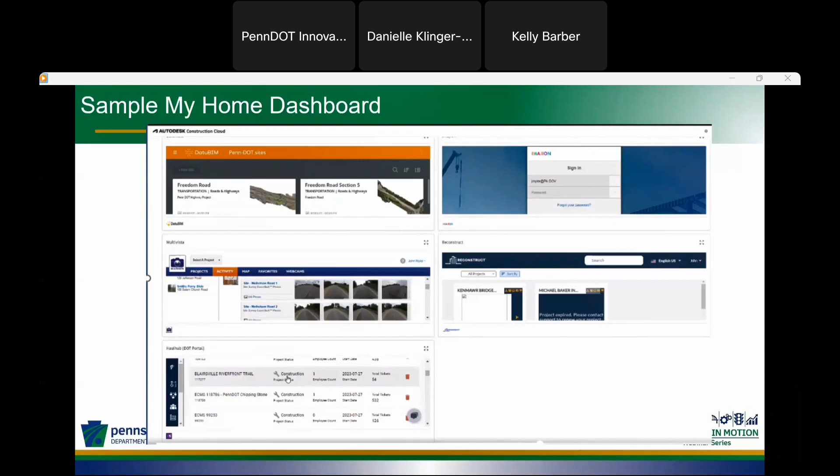Moving on from the My Home side, we do have PennDOT custom cards and interfaces.

The first card you're seeing here pulls information from our MPMS system, our planning system, showing overarching project key information like planned let date, completion date, and current construction cost. This keeps things up front for our project managers since it's pulling from MPMS. If they know their let date is changing and notice in PDCC that they haven't updated it, this could be a trigger for them to update the let date in MPMS, or the completion date, depending on the construction schedule as they complete their pre-bid construction schedule and estimate.

Another partner card that we have is our ASTA district project card. This is more of an overarching portfolio card for the projects. You can see, specific to your district area, the projects you're associated with, where they're at in progress, and if they're behind or ahead of schedule.

We've also created a general bookmark for our custom cards so we at least have those standard links over to PennDOT systems for everyone from that particular dashboard area. We also have our project GIS project map to outline where the project is at in the Commonwealth.

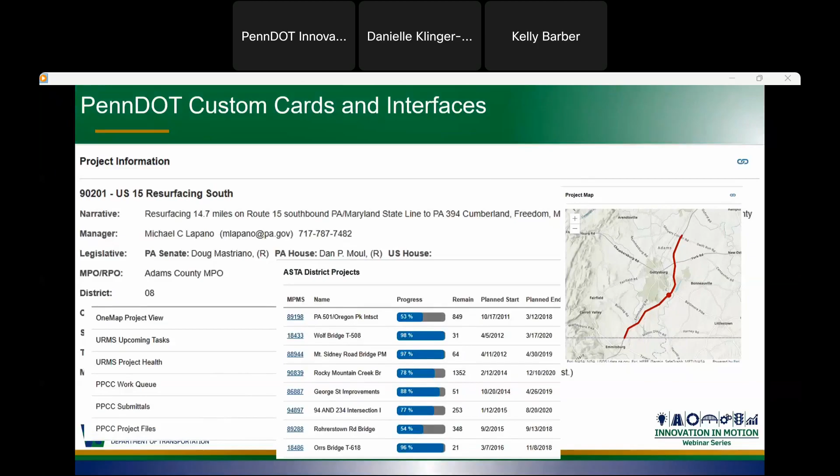Another area connecting that interoperability between systems is how our documents talk between the Collaboration Center and the department's record retention solution, ECS. As documents are created, reviewed, and eventually approved within the system, we need to make sure those approvals are available within the project development checklist in ECMS. The key part to getting things from the Collaboration Center into ECMS is that record retention system, ECS. Everything pulls from that area.

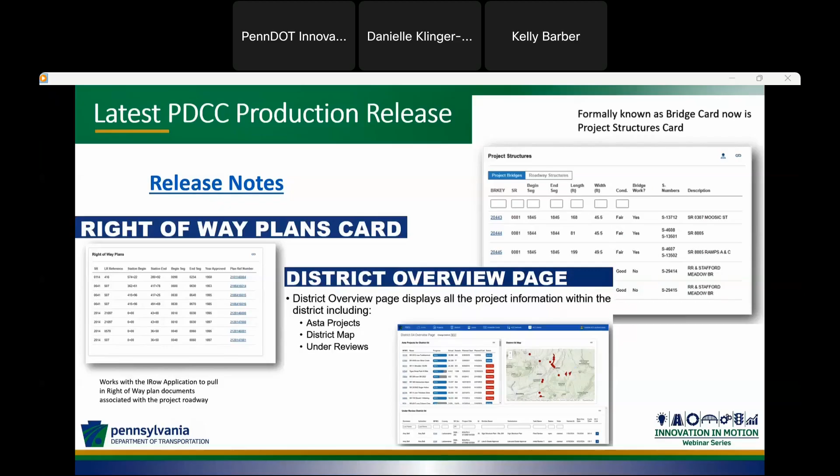Jumping over into the open areas of focus for the team and where we're looking to go with some future improvements and things that will be coming out probably within the next year or so. One is we're working on our consultant workflows.

We have a work group with ACEC PA testing and walking through those workflows within the next month, just to validate that what we have in line makes sense, and from their perspective, streamlines their workflows as well.

We're looking at adding in forms and some other components, which I'll touch on here in a little bit. And then we have the ability to work effectively and efficiently with our Bentley design files. That's another area that we are focusing on.

You'll learn a little bit here in a moment about the Voyager integration, as well as the ability to search across projects.

That is one area that we have been focusing on, is searching across projects and allowing those lessons learned, those successful submittals, to be shared with their project management counterparts, but not having to be necessarily in everybody's project, but being able to have access to get that information and share it.

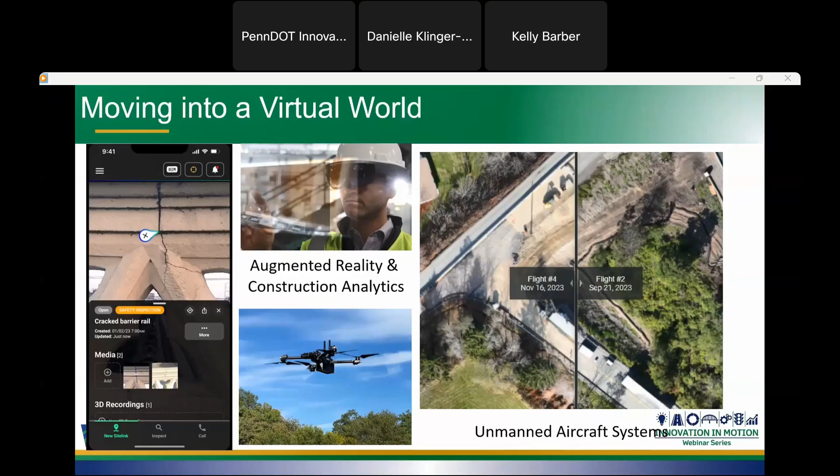So getting into our eConstruct effort, just to set the stage before I show you what we've been up to, we currently have 2 large construction projects within the Collaboration Center environment. They are the Bellefonte Interchange project in District 2, and the other project is in District 11, the Commercial Street Bridge project.

The first effort I'm going to show you is within our DataBIM solution, but DataBIM is also being used on the Bellefonte project as well. Right now I'm just going to be demonstrating and sharing with you what we have on our Interstate 81 Susquehanna River Bridge project, specifically with Randolph Road Bridge.

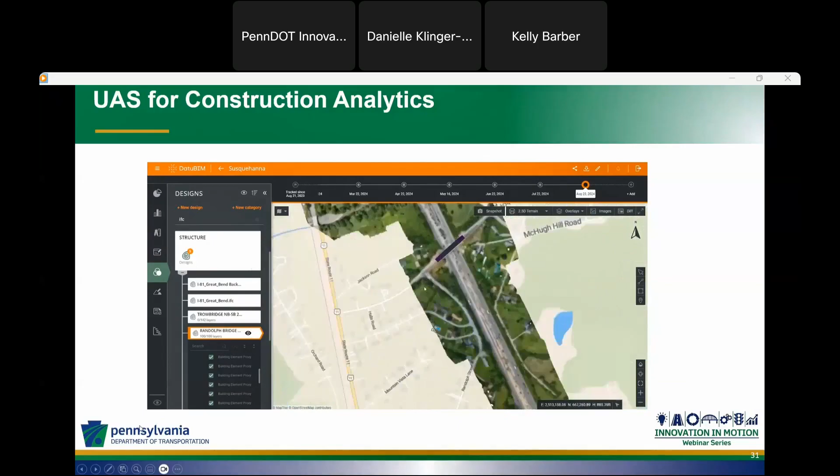So what you're going to see here is we've clicked on Randolph Road. As the video starts to play, they're going to zoom into that particular location. Randolph Road Bridge was designed in Bentley's V8i solution, and I always find this key when we talk about interoperability and the importance of being able to have systems speak and transfer information. This was designed in V8i. The contractor switched it over to Autodesk, so it went to a DWG file, and what you're seeing here is an IFC file. So 3 different file types, all within one project, different individuals touching those files.

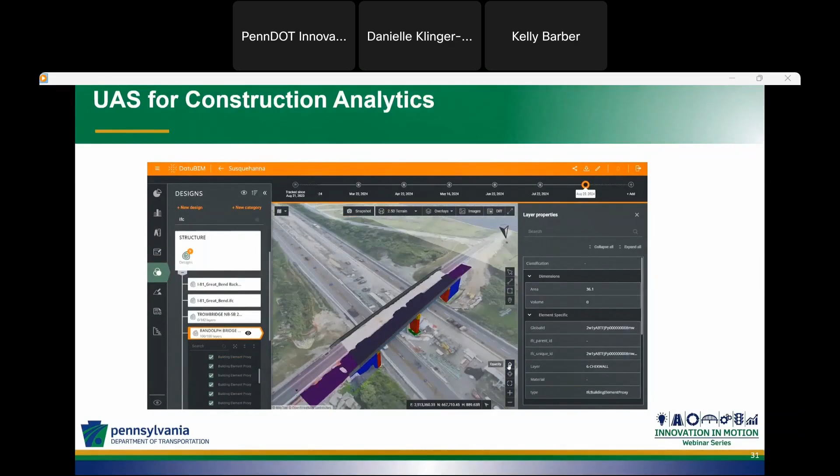As you're going in, you can see the bridge model here. All of those elements were shown previously on the right side as far as key areas. But you can go in and decide which elements you want to see, toggle things on and off, being able to see what's supposed to be there according to the BIM model versus what's actually happening out in construction. Again, bringing that visualization to the project and allowing your teams to see what's going on and focus in with that model. So again, helping with the visualization aspect of the project.

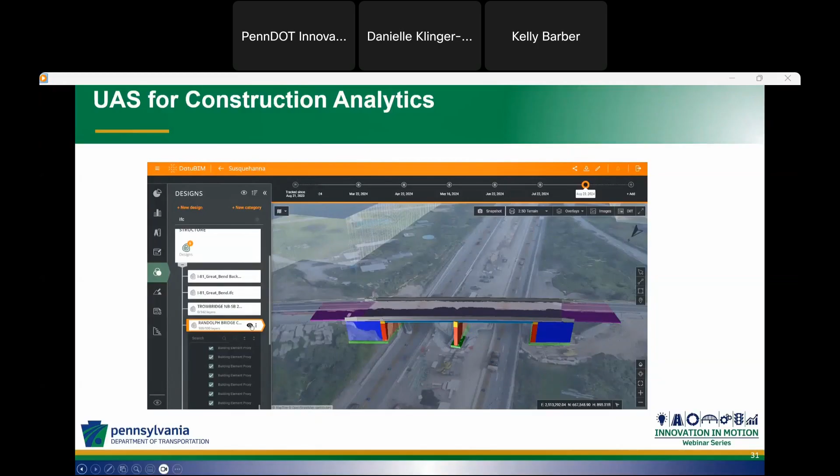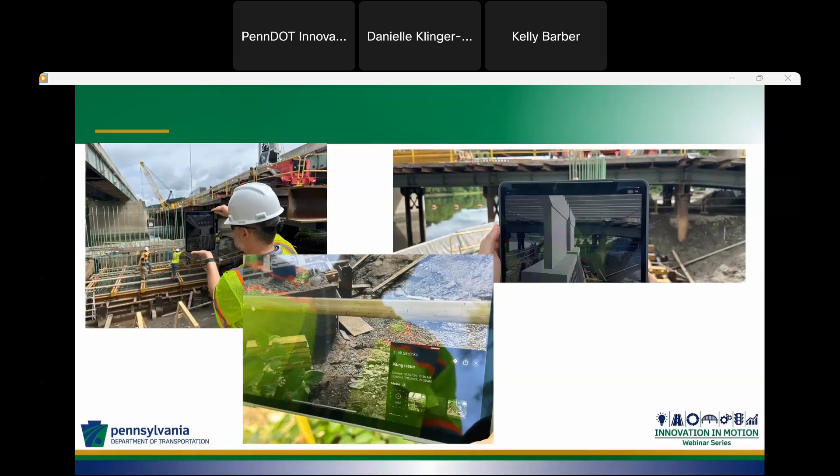So the issues that you're seeing out on this particular project are going to be tying back into the Collaboration Center. So the model files that you see are coming from Collaboration Center, and the issues that you're seeing are going between both areas. So those issues identified in the field in a different system are actually going to be tying back in so that the inspection staff only have to go at one location.

So you can kind of see here we have our site link files here within the Collaboration Center environment. This is a test project, not one of our actual projects out in the field. I just want to make sure you are aware of that. The intent of this is to show you that we have a test project 1 for PennDOT, and it is the same naming convention and title as what we have in the Collaboration Center.

So as we go into the site link application and do our settings, it really is as simple as activating that connectivity between the ACC environment and SiteLink. You can see here, this is the Susquehanna River Bridge, which is where they were out in the field. I'm obviously not out in the field to demonstrate this at the moment, but being able to go out and test those comments, showing you that we've made open comments, or what they call site links. And then they actually do tie back right into our issues over here within that Collaboration Center environment.

So again, just wanted to showcase, you can see Site Link 1 and bringing that over so that our staff, as they're potentially out in the field identifying things, those in the field, other individuals in the field, or maybe back in the office, are then able to see what they're marking up and being able to track and manage those issues.

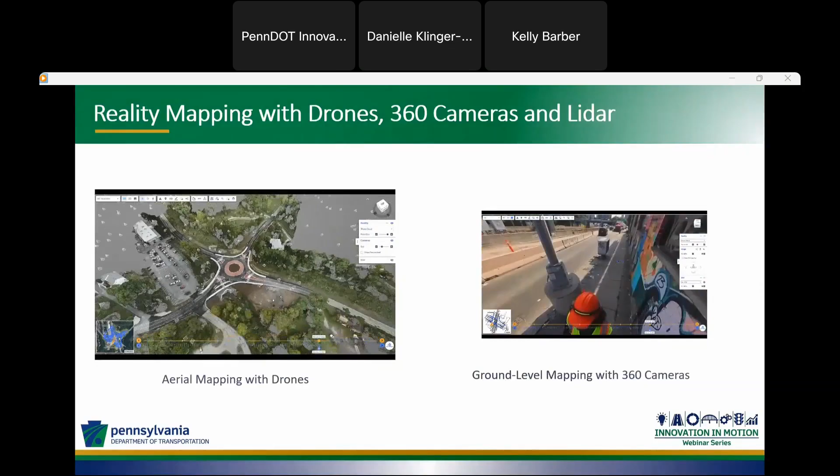Another area we're looking to expand upon is Reconstruct, which we talked about last year. Reconstruct is going to be used on the Commercial Street Bridge project. What you're seeing here is actually our McLaughlin Run Roundabout project, but we're looking at tying in reality mapping from drones on the left, 360 cameras on the right, and LiDAR.

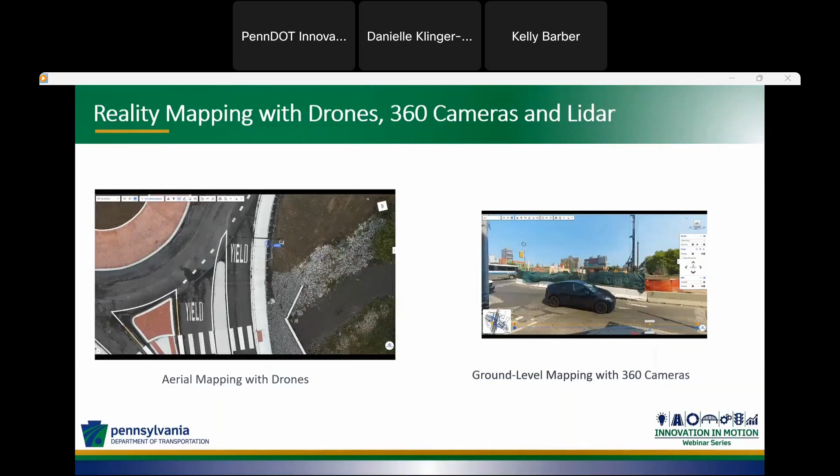One area is looking at what's out there in reality, what's being built, and tying that to the schedule versus what was planned and what's tied with our BIM model with that schedule as well. So that's one avenue we'll be looking at for Commercial Street, being able to compare the two and see how those look.

So on the screen in front of you, the top left is the reality of what's being built and how it's being done. And on the right is what was planned to be done and the time frame it had been planned to be done in.

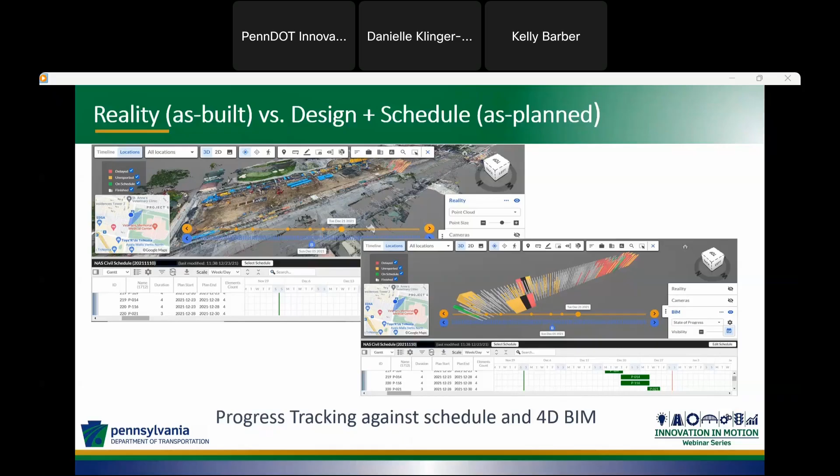This really is going to bring you in as far as that 3D time machine, I guess you could call it, being able to go in with the reality mapping, zooming into those locations, being able to take measurements and area volume as well.

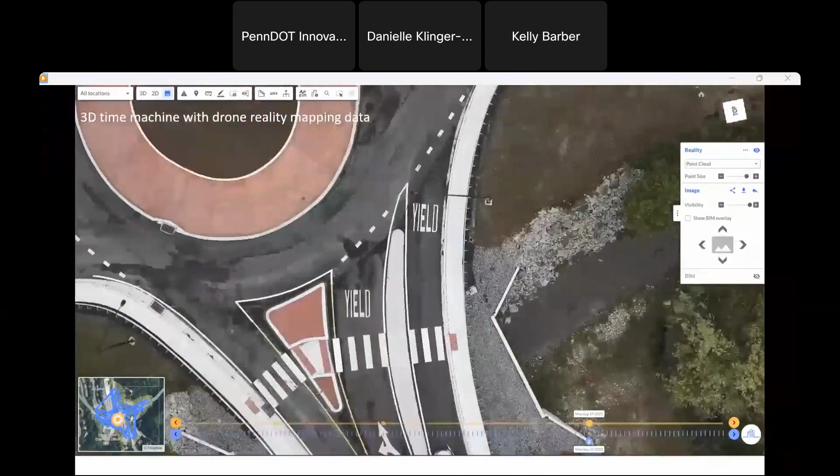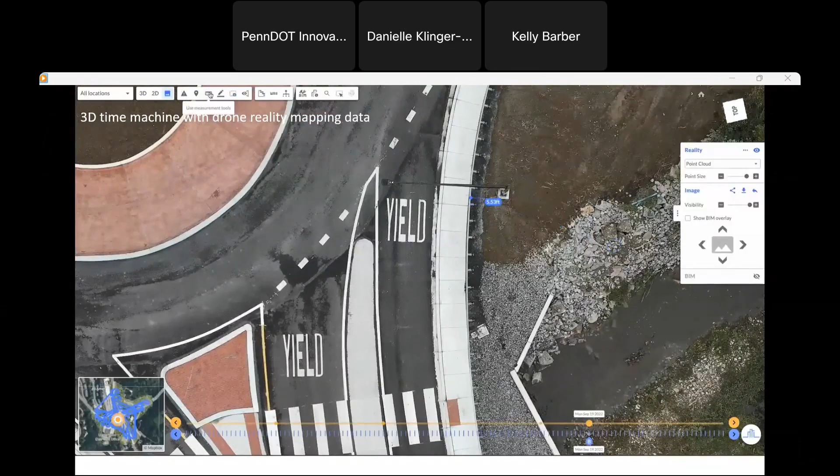Maybe a little bit of a refresher from last year, but if you weren't able to attend last year, you can see some of the other benefits of the solution, being able to go in and take those images.

And here you're just going out and calculating your areas and volumes to be able to get that information in to help with payment.

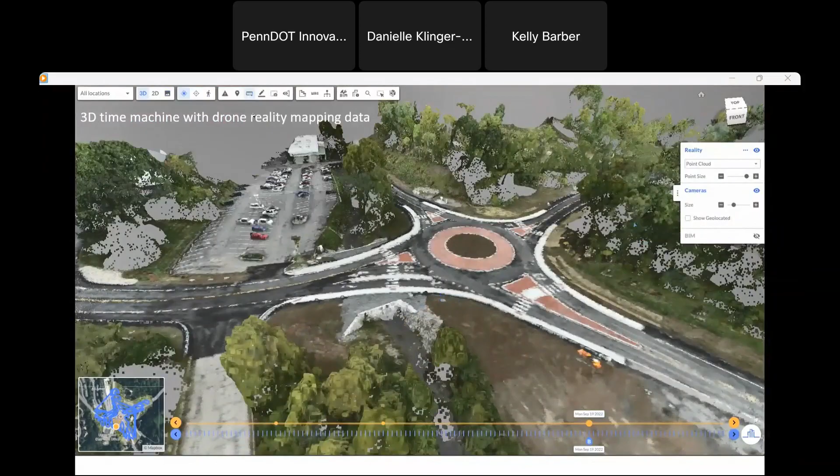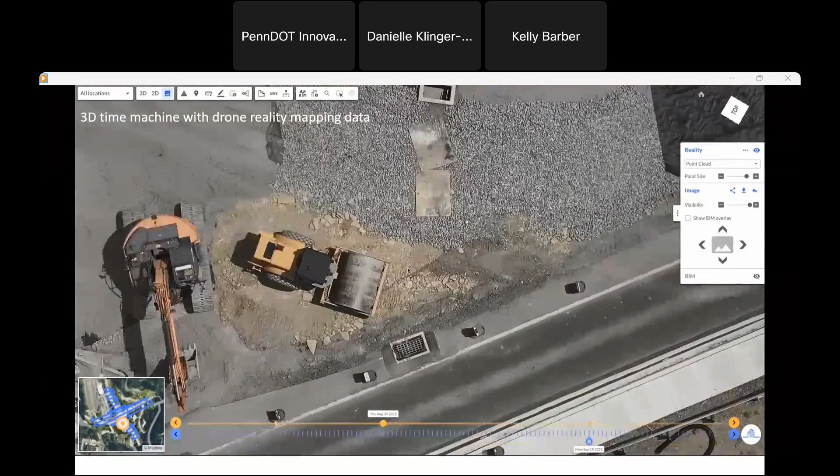And down here at the bottom, you're going to see the actual time machine itself, so you can go back in time and see where things were at different points. Across the bottom here, it shows that scale and the ability to go back to those previous captures. You can zoom in and see where things were at the previous month or 6 months ago, however that may turn out.

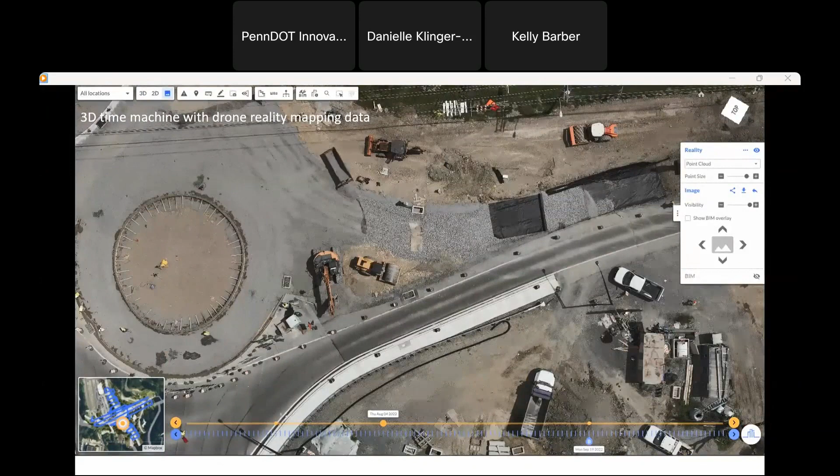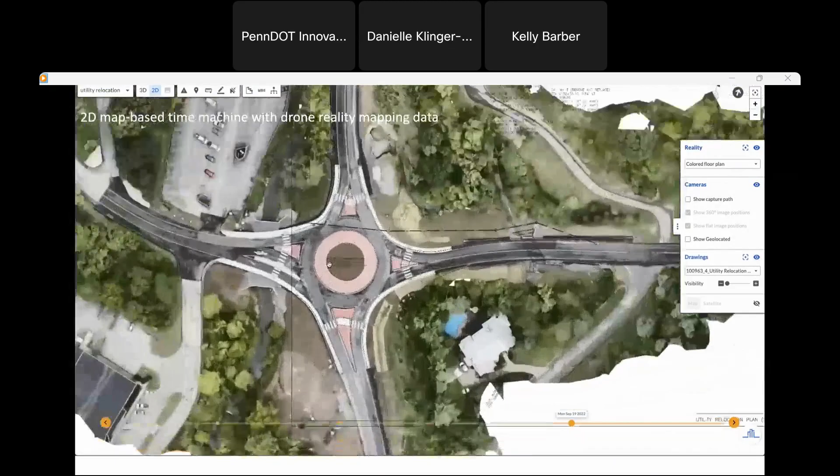This one is really bringing in that 2D side and being able to do that as well. So what you'll see here is they're going to overlay the plan set, showing up in the bottom left. If it doesn't show up, you're able to go in and zoom in on particular locations. You have that plan set overlay and can see where your utilities are for this project, for their utility relocations, zooming in to see that on top of your photogrammetric model.

And then you'll also be able to make pins and put in RFIs within this solution as well. And again, this is Reconstruct.

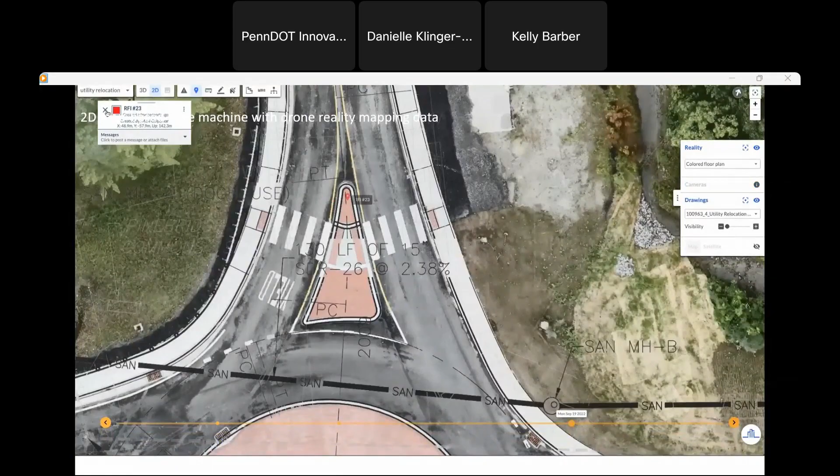See all your ground control points, turning around so you can see where you're at on the project site, and there it is there at the bottom left for that focus area. And as we go to the next one, really it's reviewing those work sequences and what is going on.

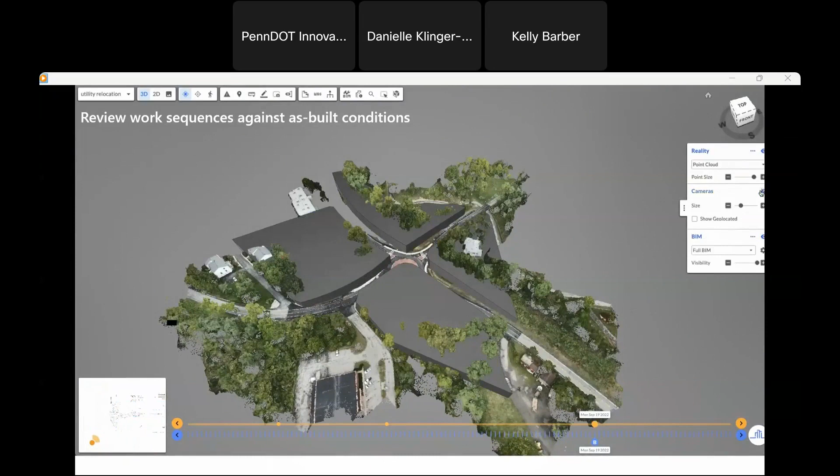So again, tying that schedule to the model. You can see on the left side you have your plan set, but you also have your model, zooming in on those particular locations. You can see where you're out there navigating and being able to bring that in.

Again, tying it to the schedule, that's what the model is doing. You're able to go in and see what's supposed to be being done. You can do look-aheads as well to see where things are supposed to be at.

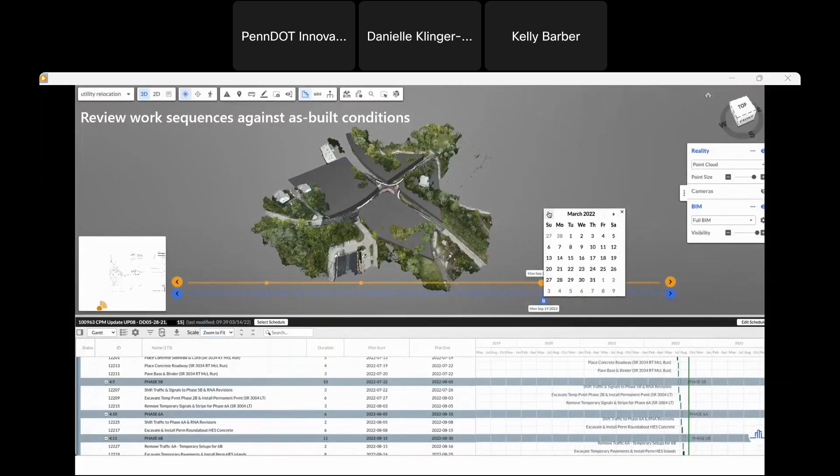And then that slide rule, as far as the dates, lets you go back and view those different schedule updates and focus in on key areas and work that was being done during that time. So you can see what's planned, and as of right now, they appear to be in construction, and it's been constructed and completed on time for this particular use case.

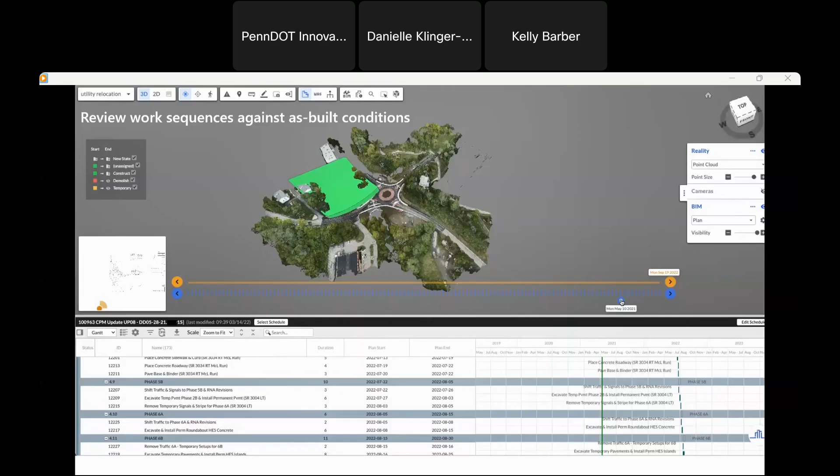Probably a broken record at this point, but bringing in that interconnectivity with Collaboration Center. You were seeing that they were putting in RFIs, and you'll see here in a moment issues, but having that ability to get those files from that one location to go back and make sure that we have the correct information for our construction team as they look at different things within the field. So this system is bi-directional interconnectivity with our Collaboration Center. Being able to pull those particular files, whether it's a model file, plan sheets, whatever it may be, across the platforms, and then the issues, being able to bring those design and field issues back into that one location within the PDCC environment for everyone to have access to.

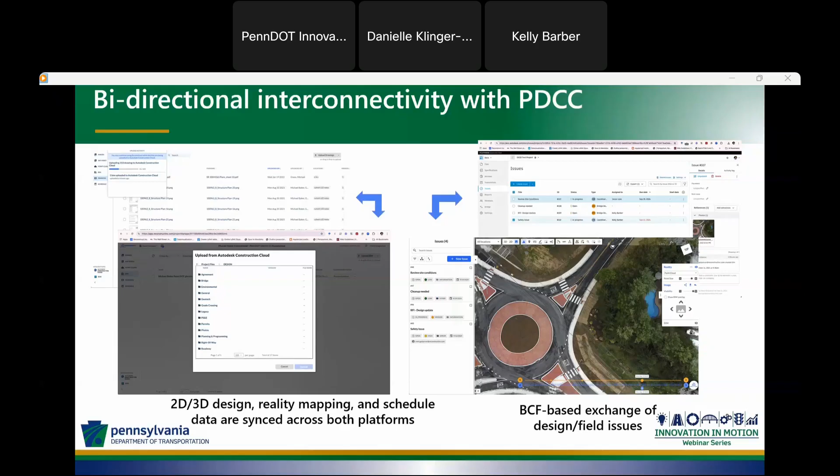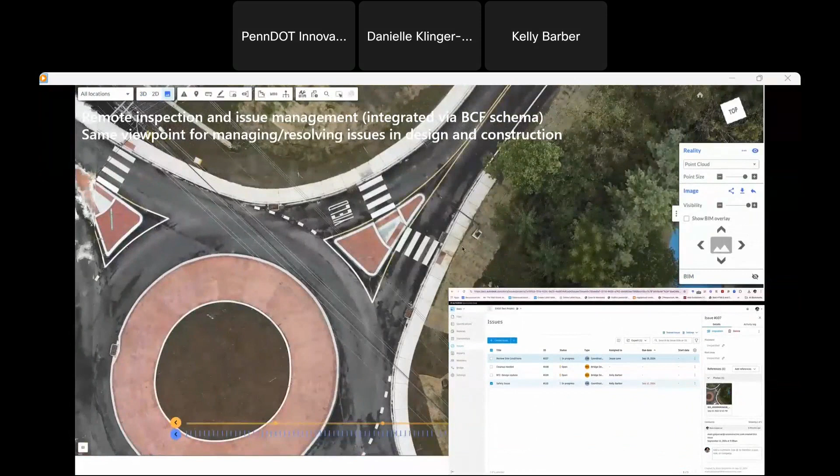And this next slide really is just going to show you how those issues work. So they're in that BIM model location that we have. They'll zoom out here, they're going to go in actually and identify an issue, zoom in even further, and get a picture here as well. So you can see they're in reconstruct, making their issues.

They're creating a new issue here as far as reviewing site conditions. They'll assign it a status, they can assign it to a person if they choose to, the level, the type it is, the due date. And then in this instance, they are going to attach a photo to it.

And then what you're seeing over on the right side is the issues that were sitting in - I have a different issue toggled, which is why it doesn't look the same. I actually have the safety issue toggled in the PDCC environment. But what you're seeing is that those issues, sitting out there in their particular environment, are coming back into the Collaboration Center, and then you'll be able to have the photos and who it's assigned to and be able to get things processed. Again, all back in one spot.